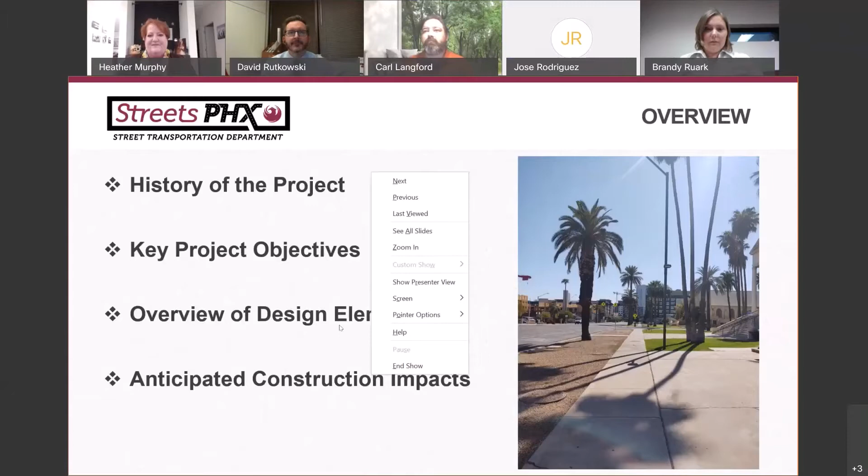Third Street is a key corridor in the Midtown Phoenix Plan and the Downtown Transportation Plan, and is the number one planned corridor in the Bicycle Master Plan. This area is also one of the city's economic and development focus areas.

In 2013 and 2014, the city conducted public open houses as part of the Third Street Pedestrian Improvement Pre-Design Report. The study was completed in June 2015.

The study documented design alternatives for retrofitting or enhancing bicycle and pedestrian accommodations within the 3rd Street and Van Buren Street corridors. The preferred plan was presented to the community at 2 highly attended open houses at both ends of the corridor in early 2016.

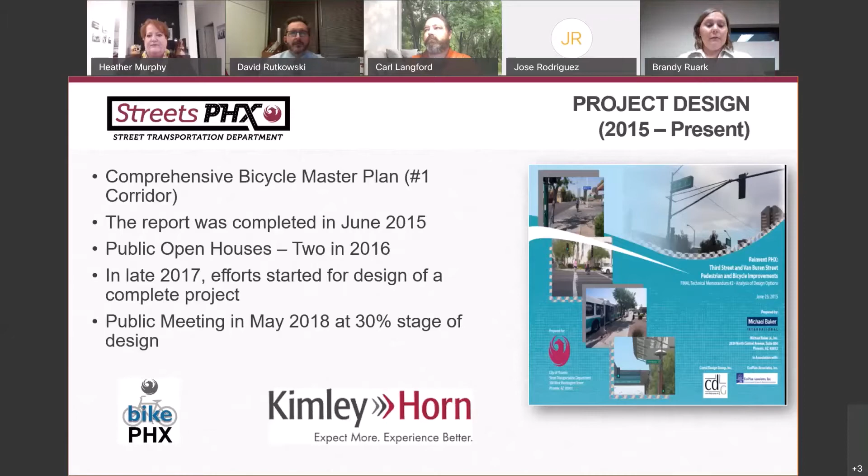2 design alternatives were presented at the public meeting. Both alternatives included bicycle lanes, bike lane buffer zones, and new shade structures.

Alternative 2 included more shade structures and intersection upgrades. The main difference between Alternative 1 and Alternative 2 was that Alternative 2 included more shade structures, shade trees, benches, and full intersection upgrades. Participants were able to provide feedback via comment card and also through survey to select the preferred shade structure type.

Out of the 3 options in front of you, we ended up going with Alternative B, pitched roof, I-beam posts, and screen walls.

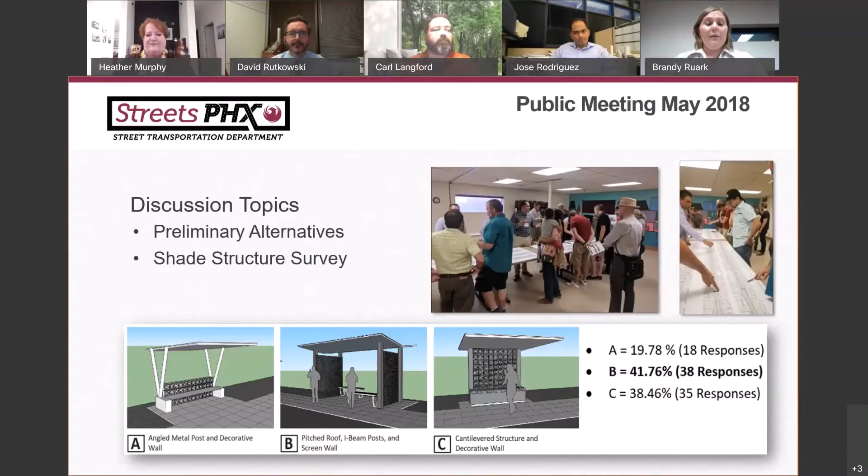Throughout the design process, we coordinated with a number of property owners and stakeholders along the project. We coordinated and obtained input from organizations like DT Phoenix, Downtown Phoenix, the Urban Phoenix Project, Phoenix Spokespeople, and Phoenix Community Alliance. More specifically, we worked with Downtown Phoenix on a lot of the landscape that is being proposed on this project.

As well as discussing how funds from the previous eBay development at Indian School would be utilized. Ultimately, we decided to apply those funds to the construction of shade structures.

We also received a lot of feedback from community members that live or work along the project area, and we worked toward incorporating their comments into the design. And in some cases, we tried to address their concerns as much as possible.

Going into key project objectives. The key project objectives are indicated here and include traffic and mobility improvements for pedestrians and bicyclists with reduction in speed, a more welcoming corridor for all users, as well as more efficient use of streets, and also repurposing of the existing street width to provide more amenities such as bike lane buffers and on-street parking.

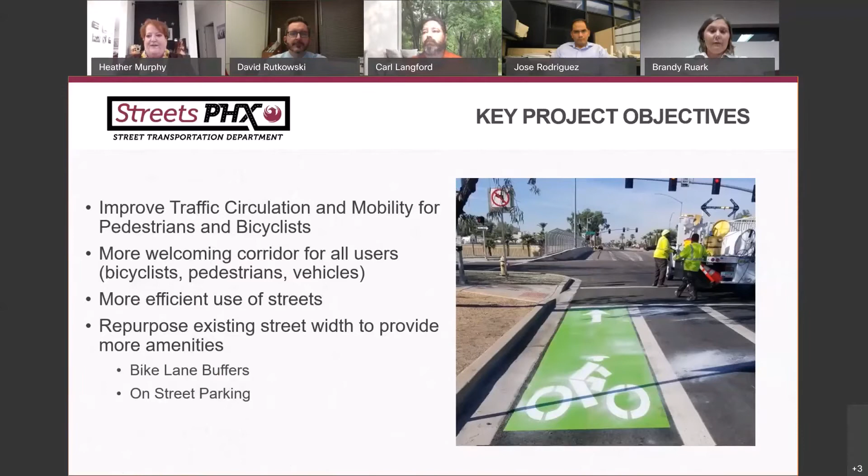I would now like to introduce my consultant, David Rutkowski with Kimley Horn, who will cover the design elements of the presentation. Thank you. Thanks, Brandy.

As Brandy mentioned, the design elements included within this project were chosen to balance the multimodal transportation needs of the local community and the surrounding area. The number of travel lanes along this stretch will be reduced by 1 lane in each direction to enhance the bicycle and pedestrian experience along 3rd Street.

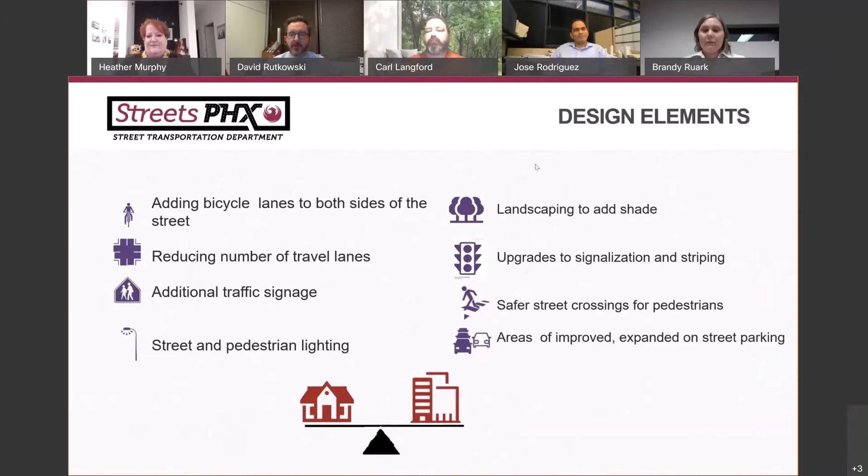Additional changes will include the addition of bicycle lanes that are buffered from the travel lanes on both sides of the roadway, additional landscaping to provide shade cover, upgraded signalization, roadway striping and signage upgrades, enhanced pedestrian crossings to increase visibility, pedestrian and roadway lighting upgrades, and additional on-street parking.

On this slide, you can see the proposed configuration of the roadway and what it will look like once the project is completed. You'll notice there will still be a center turn lane to allow access to properties along the east and west sides of 3rd Street. The white hatched areas represent the buffers for the bike lanes.

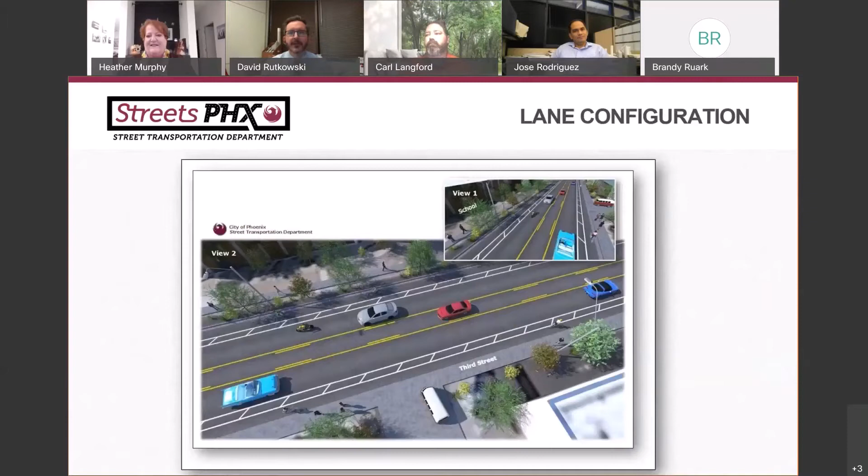In addition to the lane reconfiguration, the enhancement for bicycles will be one of the most visible changes to 3rd Street. These enhancements will include physical delineation of the bike lanes with tubular delineators to restrict traffic movements, and bicycle-specific striping enhancements to increase the visibility of potential conflict points.

You'll notice that we are installing bike boxes at 2 locations. These bike boxes allow bicycles to have priority over vehicular traffic in the travel lane at the intersection when transitioning from 3rd Street to either Roosevelt or Virginia, where bike lanes already exist.

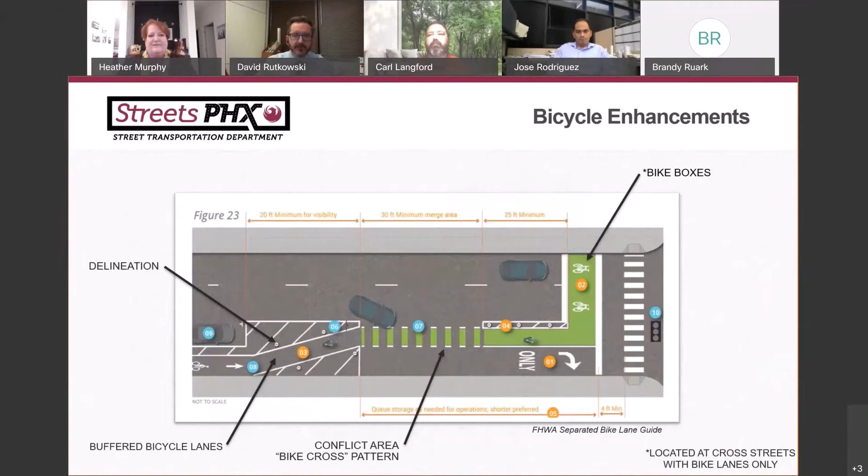This slide shows a cross-section of the roadway at an intersection with left and right turn lanes to give you an idea of what the improvements will look like from the driver's perspective. Keep in mind there's a lot of variation in the buffer widths and the locations of the green bike paint throughout the project limits.

If you would like to see exactly what the project will look like at any location, you can always refer to the roll plot exhibit that is posted to the city's website, which shows the entire project limits.

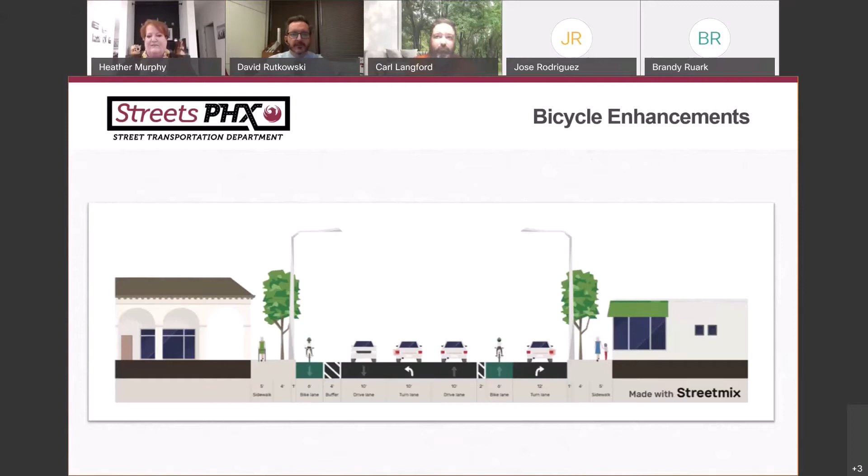This is an example of what you'll find when you review the roll plot, and this area in particular is at Roosevelt and 3rd Street.

North is to the right on this image, and you can see where the bike boxes will be installed in the southbound direction. Green paint is being used for conflict areas, and bicycle buffers are being installed as the hatched black striping you see there, but it will actually be white when the project is completed. It just shows up a little better when it's black on our roll plots.

You'll also notice the green conflict zone paint is even being used to highlight the bike lanes near the bus stops along the project.

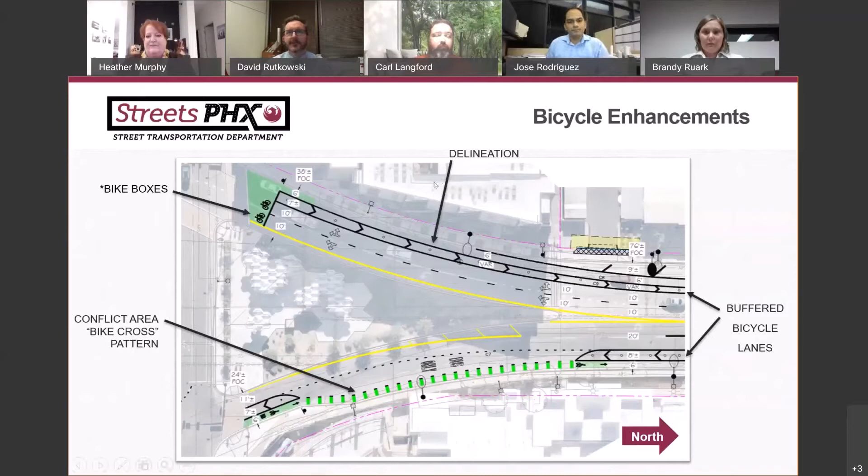In addition to bicycle enhancements, we're also making a lot of pedestrian enhancements, including the installation of continuous rapid flashing beacons at Oak and Vernon.

If you've been out there recently, you'll notice at Moreland the flashing beacons were recently installed in advance of this project and are already in use. There will be 3 different locations where we'll have these continuous rapid flashing beacons along the project limits.

During this project, the Oak and Vernon beacons will be installed, which will facilitate travel to and from the light rail station at Central and Vernon, and the Oak Street project that the city is doing east of 3rd Street, which is being done to enhance bicycle and pedestrian connectivity as part of a separate project.

At each of these locations, when a pedestrian approaches a crossing, they can activate the overhead yellow flashing beacons with the push of a button from either side of 3rd Street to alert oncoming vehicles that there's a pedestrian in the crosswalk.

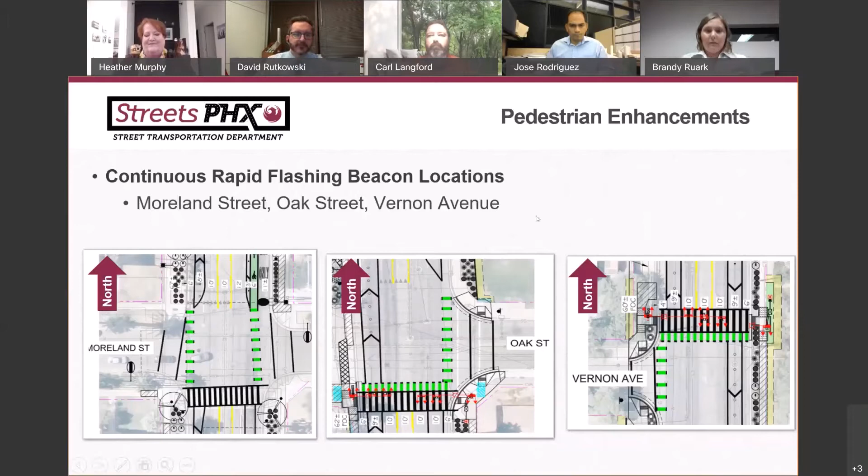At other locations throughout the project limits, we will be enhancing the visibility of crosswalks with what we refer to as a ladder-style crosswalk. This type of crosswalk can be seen from a much further distance from any intersection.

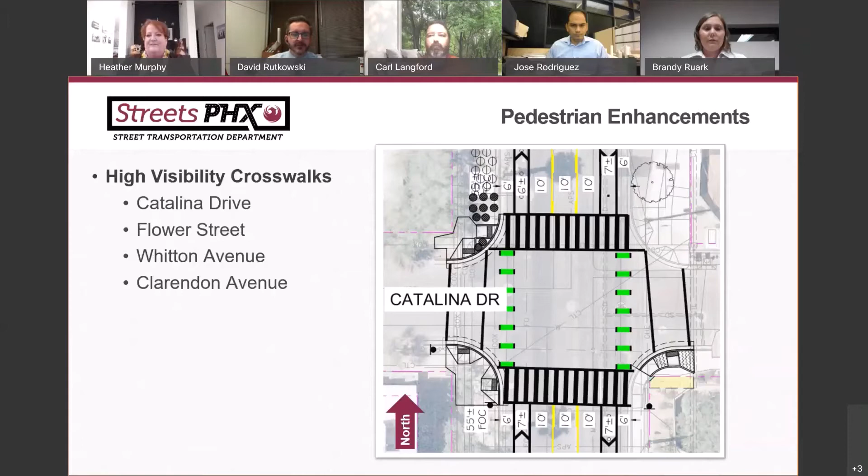To enhance the accessibility along 3rd Street, we will also be retrofitting all of the existing driveways to provide an accessible route around the back of the sloped driveway surface.

The picture on the left gives you an indication of what it looks like now throughout the project limits. The picture on the right is what it will look like once we're completed with the project.

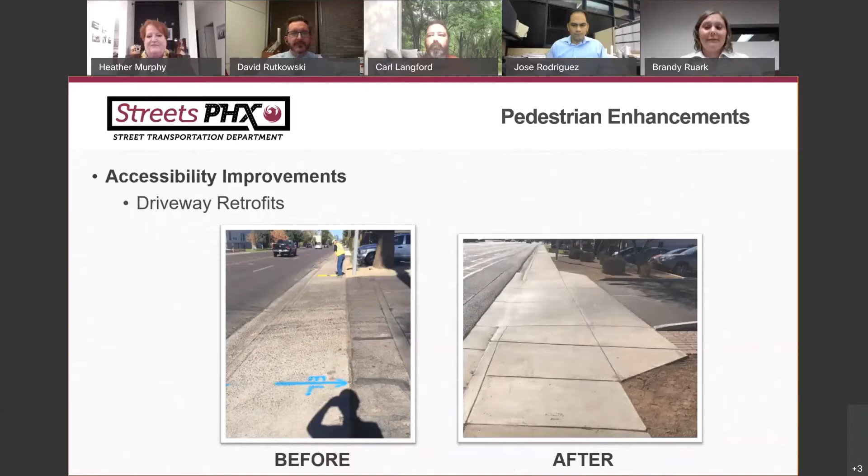Additional accessibility enhancements include the upgrade of almost all of the sidewalk ramps throughout the project limits. Each sidewalk ramp was evaluated to determine if it was compliant with current accessibility guidelines, and any deficient ramps that were found are being reconstructed accordingly.

Wherever possible, we are also installing dual sidewalk ramps at the intersections to enhance connectivity. The traditional ramp layouts found within the project limits predominantly direct pedestrians into the intersection using a single ramp at the midpoint of the radius. The new ramp layouts will direct pedestrians into the roadway in line with the crosswalk, making the crosswalks much more directional.

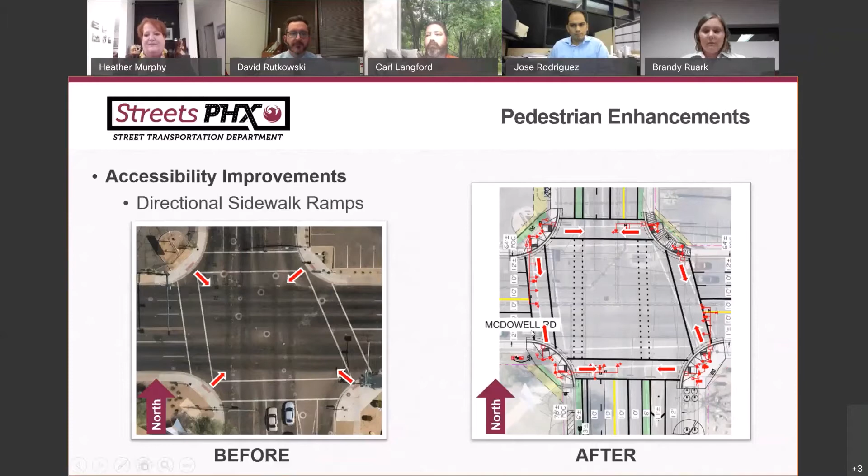To further enhance the pedestrian experience along 3rd Street, this project will be installing large and small shade structures. The large shade structures will also have seating installed to allow pedestrians a place to rest and escape the sun. The small shade structures design was developed to maximize the shade provided at any time during the day using angled roof panels.

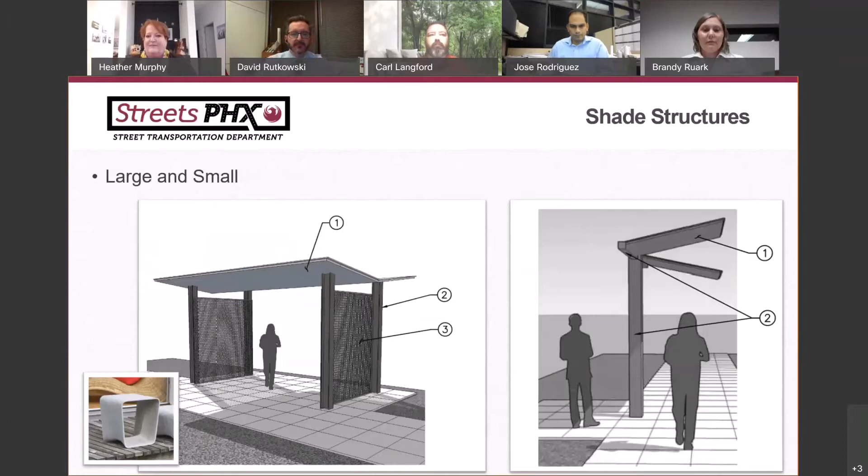Large shade structures will be installed on the east side of 3rd Street, south of McDowell, and south of Earl, at each intersection.

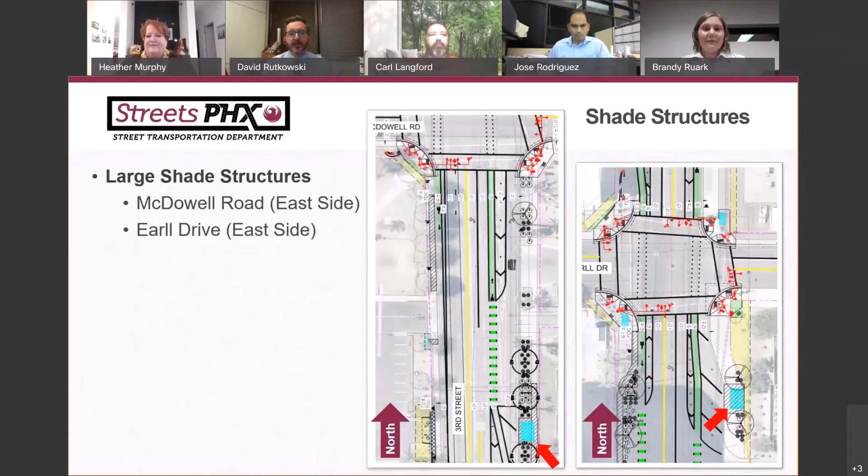Small shade structures will be installed at 4 intersections throughout the project limits. At Oak Street, shade structures will be installed along the south side of the intersection near the rectangular rapid flashing beacon crossing. At Thomas, we have one shade structure being installed on the southeast corner.

At Earll Drive, we will be installing shade structures on the southwest and northeast corners of the intersection, and at Indian School, we will be installing shade structures on the northwest and northeast corners, which will enhance the entrance to the Steele Indian School Park.

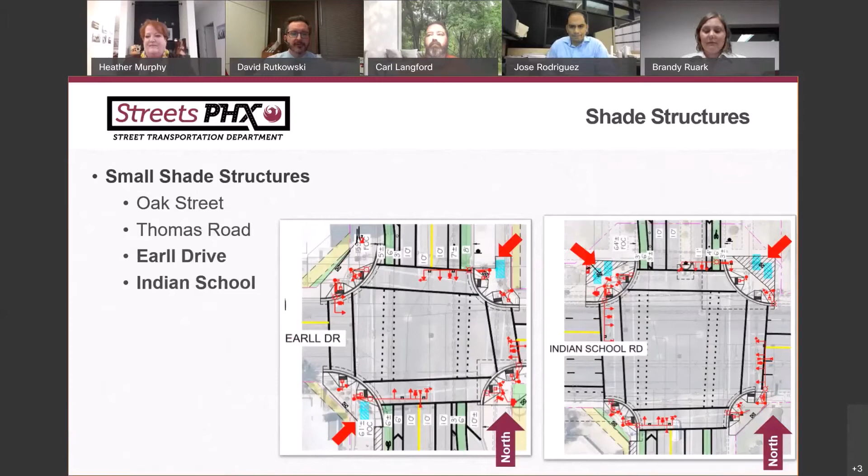As previously mentioned, we will be upgrading lighting for pedestrians and vehicles, but predominantly only in the area south of I-10, since lighting already exists to the north of I-10. South of I-10, we will be installing LED pedestrian lighting and replacing and respacing existing street lighting with LED fixtures to make the lighting more consistent.

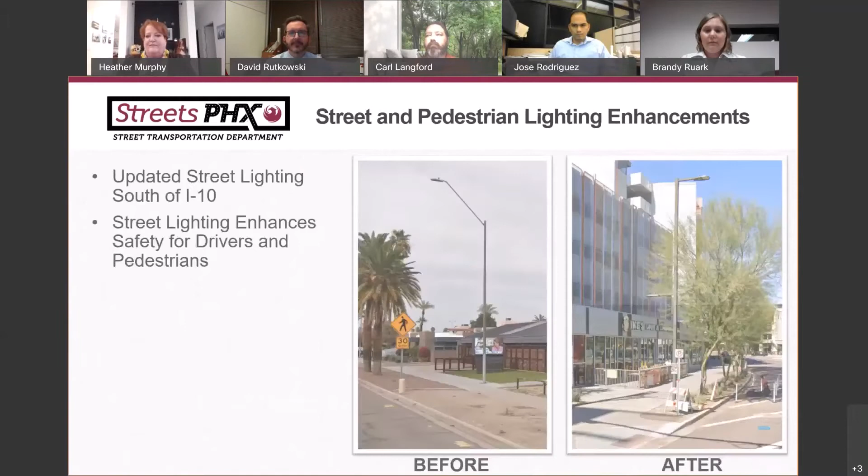I'm waiting for a cross section of the roadway to appear, and it'll appear here in a second, but here it is. In this picture, you can see where the street lighting will be installed in relation to the bike lanes, the sidewalks, and the street.

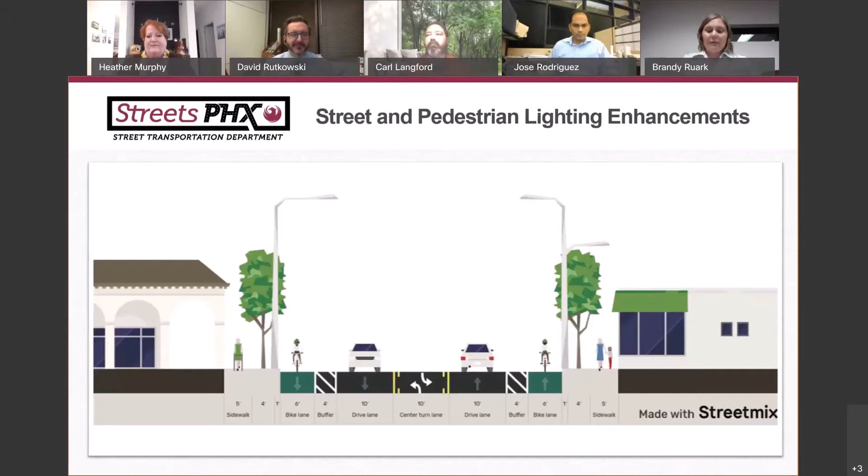One of the major upgrades that we'll be completing with this project is traffic signal replacement. At each of the intersections, we will remove and replace the existing signal poles and equipment. The new traffic signal layouts will unify the pedestrian indications, provide additional signal heads for better signal visibility, and provide push-button activation for pedestrians to activate the pedestrian crossing portion of the signal.

Flashing yellow arrows will also be installed with this project to allow vehicles to make left turns after the dedicated left turn phase of the signal expires.

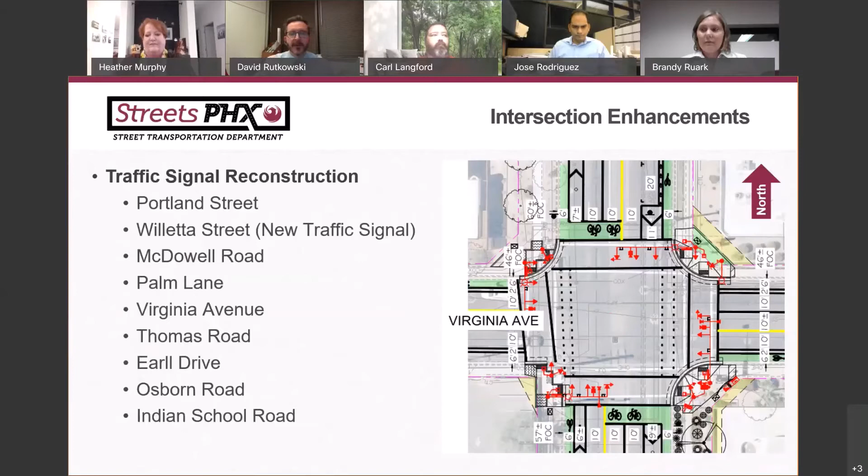Vehicular enhancements will also include more on-street parking and retrofits to existing on-street parking throughout the project limits.

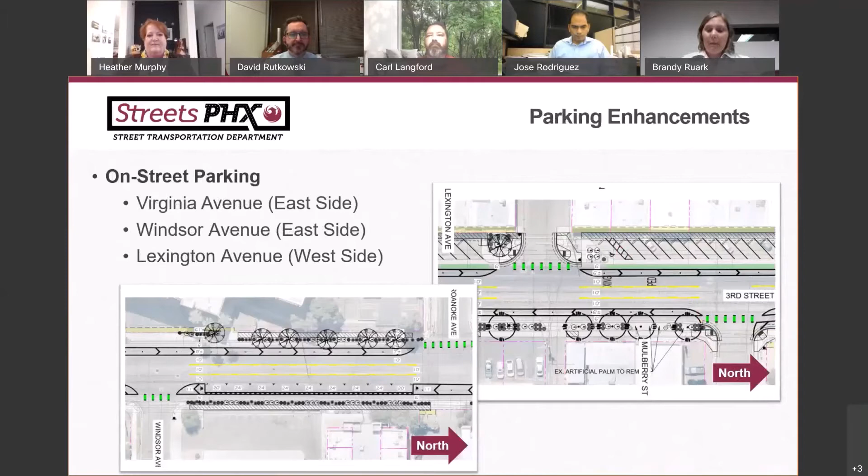In the Lexington area, there is existing diagonal parking that will be reconfigured to allow the installation of a sidewalk. As you can see in the picture on the right, the existing sidewalk access is actually underneath the building overhangs, and there are multiple columns that complicate the use of the sidewalk for pedestrians. The new sidewalk will be constructed just east of the overhang to provide a more accessible route.

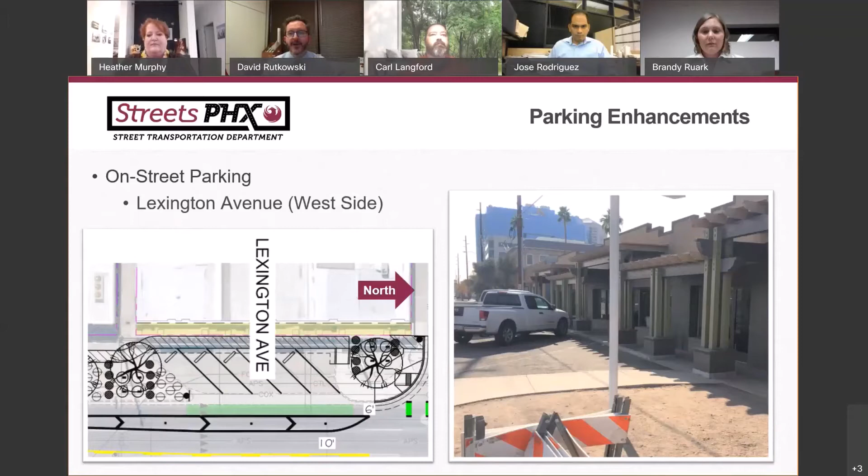At Virginia and Windsor, along the east side of 3rd Street, additional on-street parking will be added. The on-street parking spaces provide an additional offset between the traveling vehicles and the bike lanes to further enhance bicycle and pedestrian safety. Physical separation between the bike lane and the parking stalls will be added using a raised pavement marker.

Similar to the half-dome buttons that you see on streets throughout the city, this will help deter any interaction between parking vehicles and the bike lane. You'll also notice that the parking spaces are positioned to the left of the bike lane so that when drivers open their car doors, they're not opening them into the bike lanes.

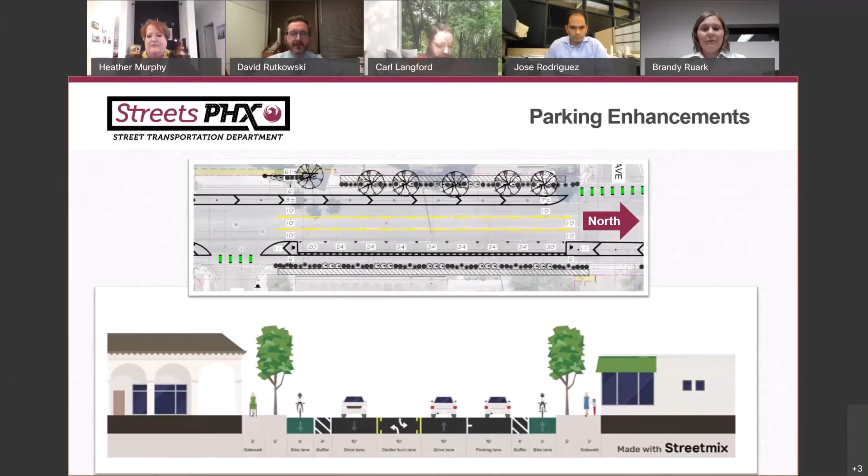Last but definitely not least are the landscape enhancements that will be part of the project. I mentioned earlier that we will be increasing the amount of shade available along 3rd Street with shade structures, but we'll also be installing around 150 new trees within the project limits.

The landscaping within the city's right-of-way will be fully refreshed with new landscape irrigation, decomposed granite, and accent shrubs to unify the landscaping theme. With that, I'd like to turn it back over to Brandy.

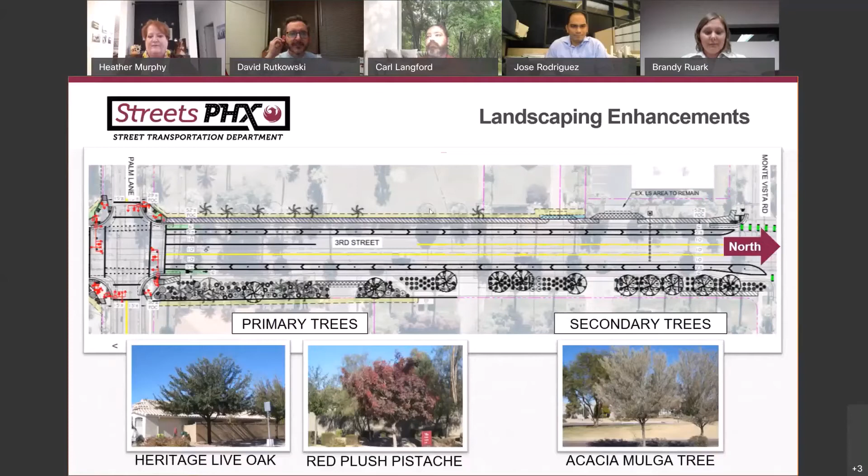Hello, everybody. Yes, I'd like to cover the anticipated construction impacts for the project.

All construction-related impacts will be communicated to those residents prior to construction, and also to those businesses and residents adjacent to the active work site.

Some of the anticipated impacts include north and southbound traffic along 3rd Street may be reduced to 1 lane in each direction. Left-hand turns may be restricted at times throughout the duration of the project, and sidewalks may be temporarily restricted while being reconstructed.

Also, if a business has more than one access point, the contractor may close one driveway at a time.

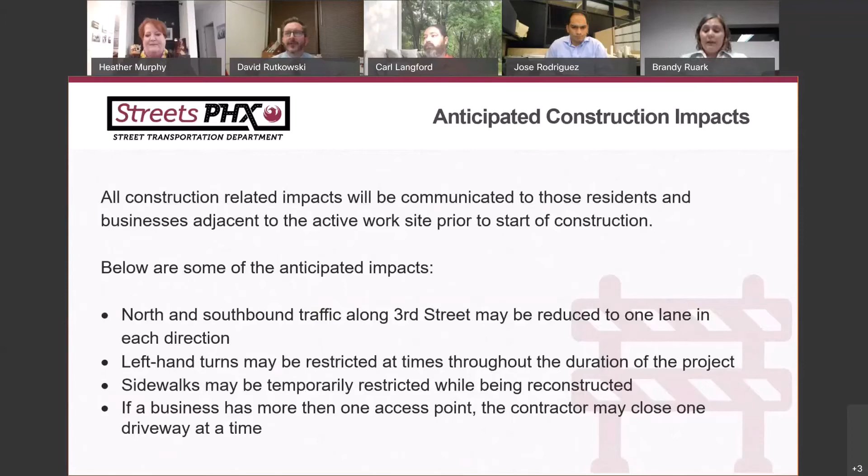Last but not least, I'd like to discuss the timeline for the project. We've already completed the design. We are working with utility owners to relocate facilities that are in conflict, as well as working with power service providers for new streetlights and traffic signals. We will be advertising for construction services in the next few weeks, and we're anticipating construction to begin in spring of 2021. Thank you.